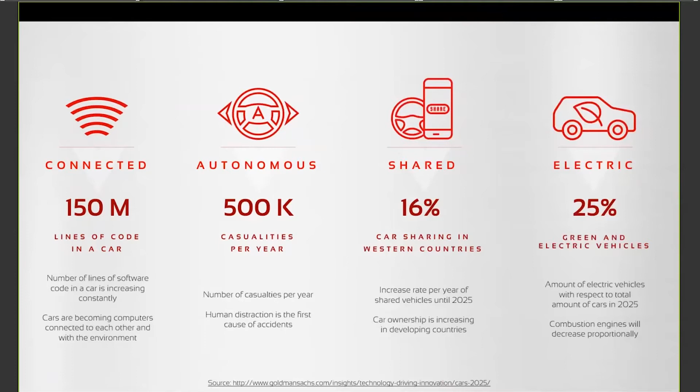All these trends are setting up important challenges to the process related to the creation and implementation of new vehicles. This is making an impact on automotive technology from different points of view. First of all, from the market, we're going to have less time and budget available, so the cycle to develop a new vehicle will become more and more shortened. At the same time, the product will show an increase in complexity due to the different systems that are going to be integrated into the vehicle.

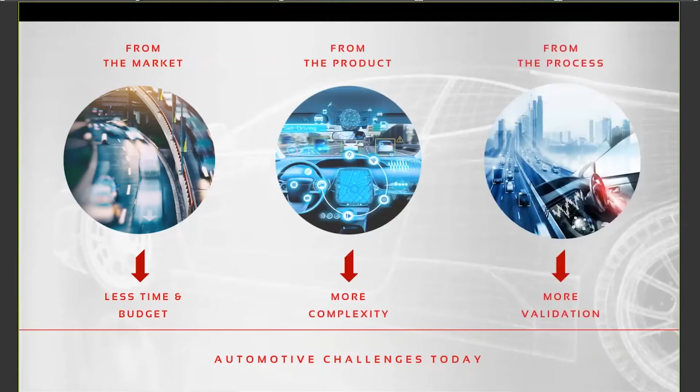Also from the process of developing a new vehicle, there will be additional challenges related to the fact that more validation will be needed. So for this reason, the traditional development process appears to be not completely tailored for the new challenges.

In the old style vehicle development, we were supposed to go from a concept to a sign-off phase of the vehicle, going through different phases which are from time to time seeing the appearance and the usage of hardware testing, which on the other side is showing up at a late phase of the development process. This could be an issue because of the new challenges set by the modern subsystems.

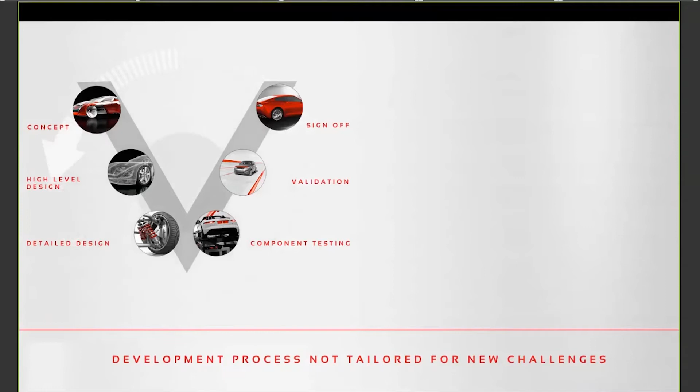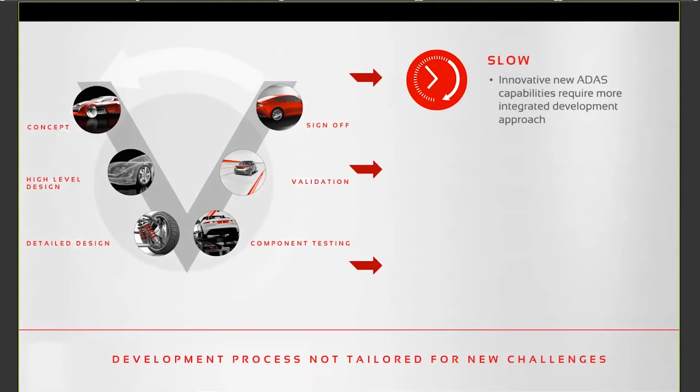So for what regards ADAS, the process of integrating the ADAS system requires an integrated development approach. The fact that the process of creating a concept, and only in a later phase having the availability of prototypes, is making this process too slow.

It could also be difficult to apply this process because the ADAS systems require a lot of miles to be driven to certify the prototypes, and this is posing an additional problem.

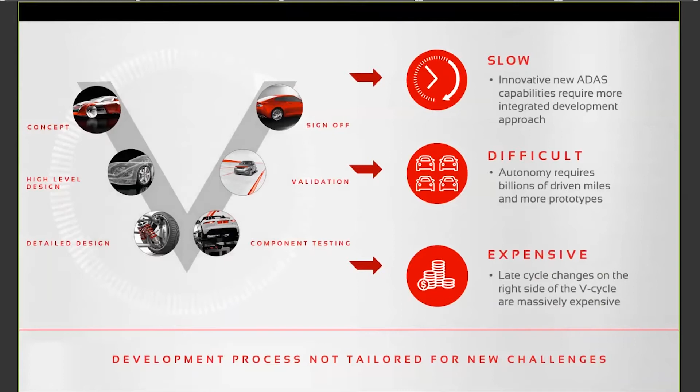And of course, all these aspects listed before are also showing an effect on the costs, so the cycle, as it was tailored before, is very expensive.

So as VI Grade, we are trying to set up a set of solutions that could help to make this process smarter, basically bridging the gap between testing and simulation. This is realized mainly by introducing a virtual environment in which it is possible to analyze and test the vehicle in an early phase of the development process.

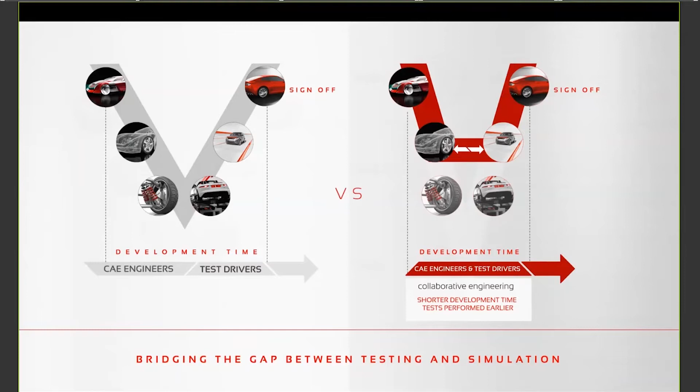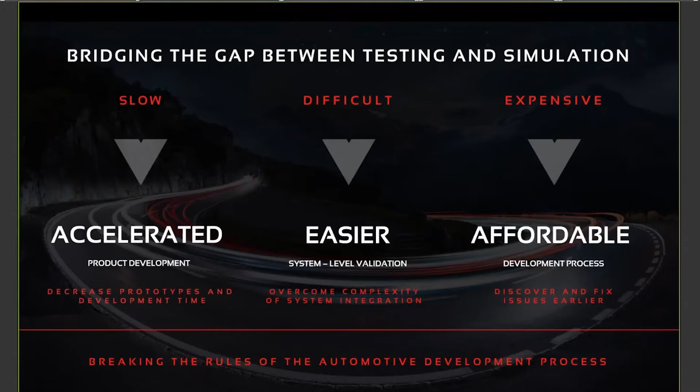So the usage of the driving simulator could be the bridge in which the development process can benefit from the advantages of being faster and at the same time accurate. As a result, we could transform the weaknesses that are characterizing the traditional development process into strength points, so it would be quicker, easier, and more affordable to implement and develop a new vehicle.

In order to do that, we rely on an open environment that, as I said, consists of different components, the main one being the driving simulator, which could integrate different types of technologies.

So we can mention the multi-body approach as a typical CAE approach to vehicle development from the point of view of engineering, but we can also include in the same environment other tools that are more focused on development of systems and controllers, up to the point in which we can interact at the early stage of the development process with prototypes and hardware components within the environment.

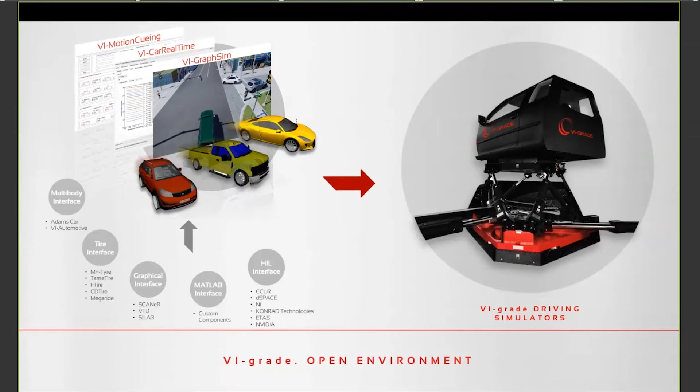Finally, with the driving simulator, we can have also the human being part of the process and be able to test the vehicle performance and vehicle characteristics right from the beginning of the development process.

If we focus on the specific application related to implementing a driver assistance system, we can face it from different points of view. We can start from offline and compare to what is required to test the same system in the real world. If we talk about the pure virtual simulation, the offline approach, there are some components in the environment that would be required.

First of all, we need a vehicle model representing the properties and dynamic response of the vehicle. We can eventually populate this model, including controllers that are now part of the vehicle environment. Besides that, we must think about a proper scenario in which this vehicle model should be exercised, so we need a simulation environment in terms of traffic and in general the environment in which the model can be simulated.

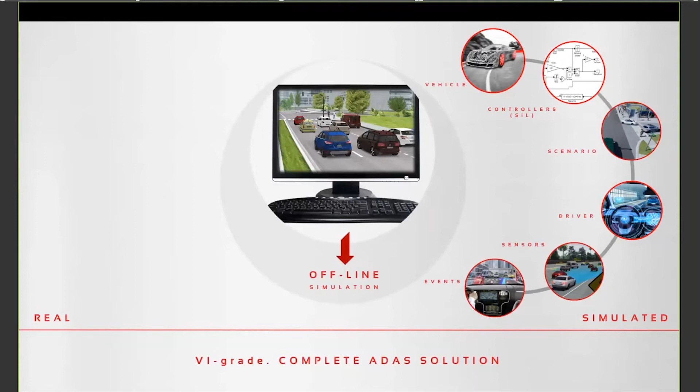We need a driver model, and also we need to set up a set of events in which a virtual sensor model can be tested. If we look at the same type of study in the real world, the approach is very similar, but the difference is that in this case we will have a full set of prototypes in the game. So the vehicle would be a real prototype, the controllers would be hardware in general, the scenario needs to be set up in a proper environment to be safely tested, and of course we will have the presence of a real driver with sensors and events that we want to create and simulate to assess the different functionalities that we want to study.

So we can understand that, especially in terms of events, setting up the specific condition in which you wanted to test a given ADAS function may pose some remarkable challenges.

If we combine the two things together, we may have an environment in which all these things can be used at the same time, taking advantage of their availability at different stages of the development process. So if we consider the driving simulator as an integration platform, in this environment you can have the virtual vehicle model, virtual controllers, but could also integrate hardware controllers with the scenario you want to test. At the same time, you can implement real hardware sensors that are excited by input coming from the visuals, for example, or from the radar, that are part of the virtual environment.

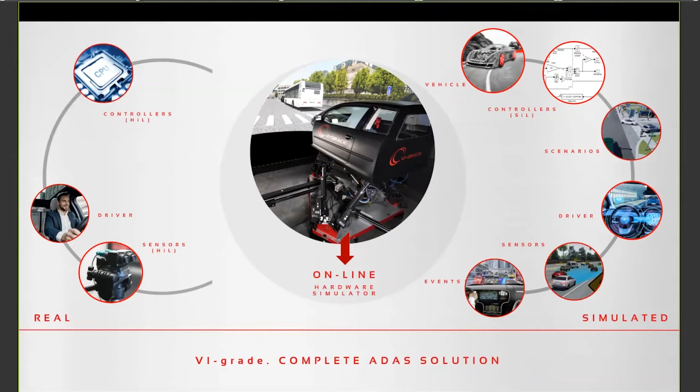And in all this scenario, the human is also playing a role. You can get the feedback that the driver could provide using a real prototype directly on a driving simulator. Here we can see a couple of movies showing this application on our driving simulator.

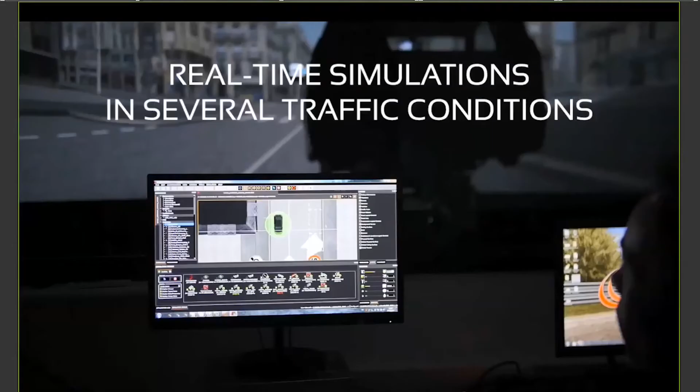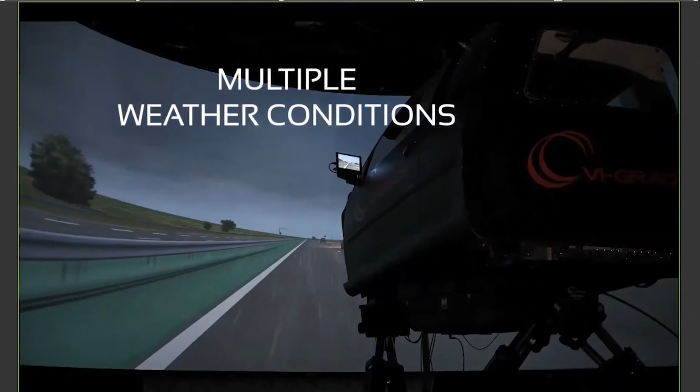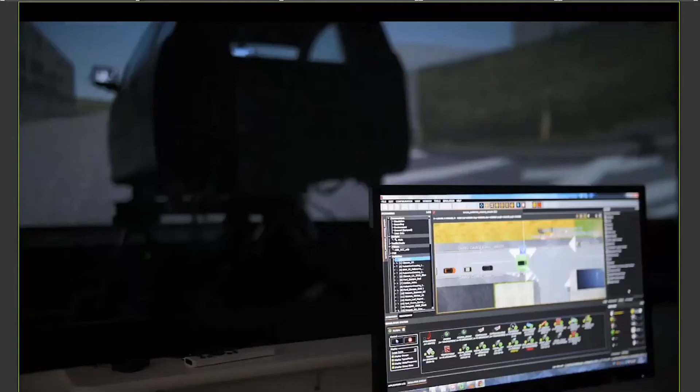For example, here you see our motion driving simulator, a dynamic simulator in the SCANeR environment, in which we can provide specific traffic conditions and also specific scenarios, like country or highway, or consider the effect of weather during the simulation. In this context, it's also possible to interact with specific additional entities like other vehicles, pedestrians, animals, and whatever you encounter during a real testing session, including the possibility of having a virtual representation of an ADAS system and sensors.

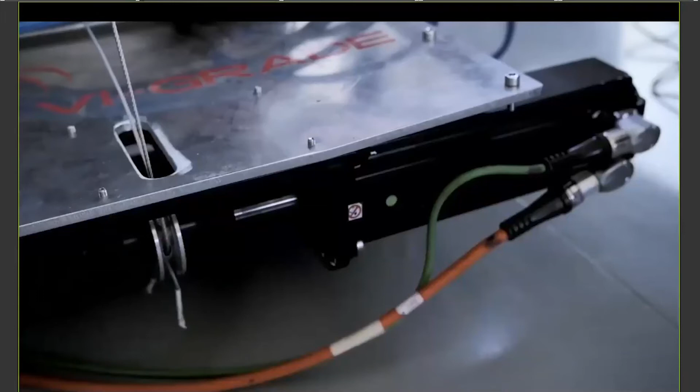Specifically with regard to the sensors definition, we could also take a further step to test the real or virtual sensor in this environment. In this video you see an application related again to a driving simulator, in which besides the typical components like active seats and belts provided with our simulators, and of course the vehicle model, it is possible to test specific functions that are part of ADAS systems.

For example, we could implement an autonomous driver that could be directly tested. Here you see that the driver is activated, and basically the automatic control algorithm is taking control of the vehicle, and it is also possible to manage the transition between the machine and the human.

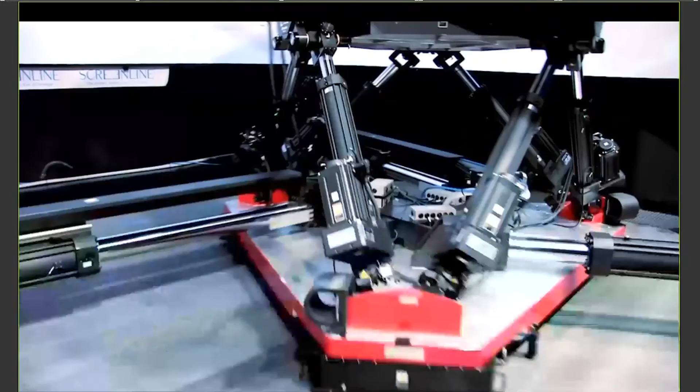It is possible to focus and reproduce highly dynamic maneuvers, comparing the automatic behavior of the autonomous driver with the purely human behavior, or also combining the two in an assisted configuration. So this is basically an overview of the possible applications available when using a driving simulator together with proper modeling of ADAS systems and sensors.

So now I would like to hand over to my colleague Mark, in order to have a deeper insight about some of the applications that we have been implementing.

Yeah, thank you Francesco. Just to go into a little more detail of the things already described in the presentation so far, here we can see the general architecture for using VI Drive Sim for ADAS applications.

The way this works essentially is that Drive Sim is acting as the hub. Everything is coming through Drive Sim, which is the real-time system, entirely necessary if you're doing driver-in-the-loop test cases. You can connect the hardware side of things, so in this case you could have a radar or a camera, connected to the Drive Sim ecosystem, communicating in both directions. We can send information to a camera and then receive the information back.

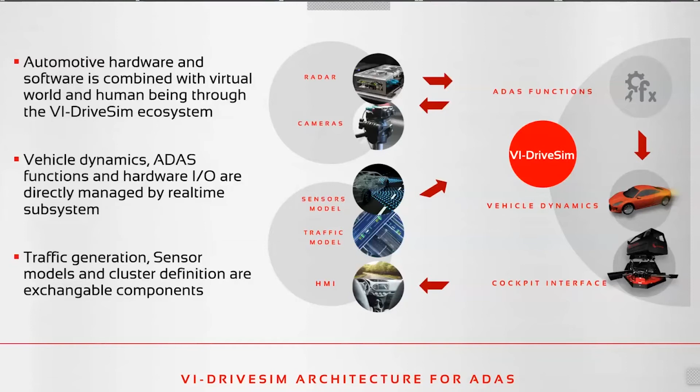To give you an example of some test cases we've built up at our sim center using the DIM, we wanted to introduce a lane detection system. We set up the environment as shown here: a physical camera pointed at a screen, looking at the image generated from the virtual environment. The camera is then connected to an ECU, in this case the NVIDIA Drive PX2.

It's receiving the image from the camera, and the onboard AI is processing this image, searching for the lane markings. The lane marking information is then output from the ECU, fed back into the Drive Sim ecosystem, at which point it can be picked up by the ADAS controllers and used to control the vehicle in some way.

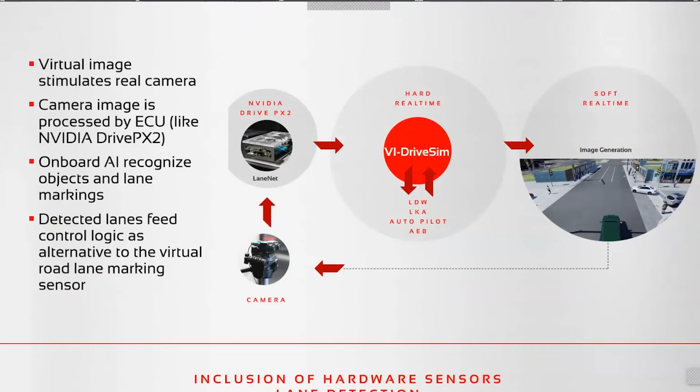Going a little further into this test case, there are some additional possibilities. As I said, we had the camera pointing at a screen, the projected image on a screen or monitor. Alternatively, you can inject the image directly into the NVIDIA board, bypassing the need to actually point the camera at a screen.

A nice option in this case is, because we had the ground truth for the lane markings, we could compare the output of the LaneNet, the AI calculating the lane markings, with our ground truth reference, and then tune the system and validate that it's working as expected.

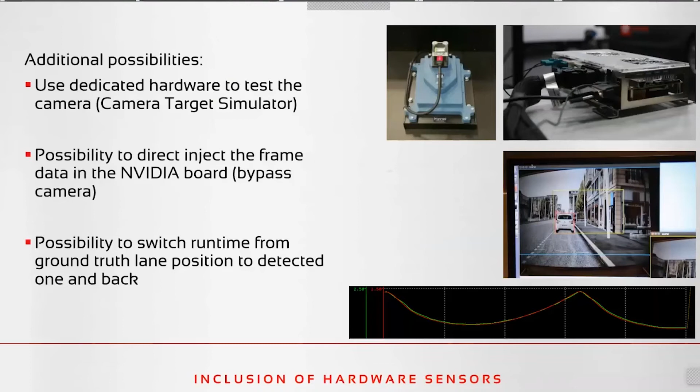Another test case we set up was using a radar instead. In this case, we had this radar target simulator, which we connected to the Drive Sim ecosystem as shown in the previous slides, and more or less the same concept applies.

In this case, we would use the virtual sensor inside the traffic software to detect the virtual object. We then send this virtual object's position and information to the radar target simulator, which will stimulate a physical radar, the same radar you would end up using on the actual car in reality.

So you stimulate this radar, and the true output, the real output you would expect to find on the real car, is then fed back again to the Drive Sim ecosystem and can be picked up by any ADAS controllers present, either software in the loop or additional hardware. These ADAS controllers can then influence the dynamics of the vehicle.

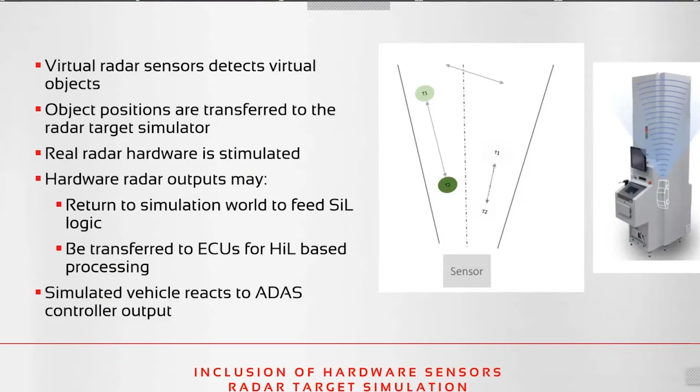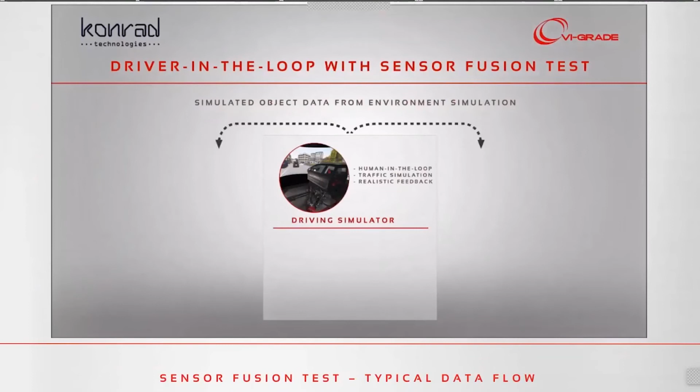On top of this, it's clear that for full ADAS applications, you need to be able to run multiple sensors in parallel. So the VI-DriveSim solution is capable of supporting this. We set up a test case with Konrad Technologies, running the camera and radar simulator in parallel, all in real time. The concept is the same as before: we generate virtual data of simulated objects, send it to the real simulators, the radar and camera in this case, which stimulate real components. The output of these real components goes back to the real-time system, which can then be used by ADAS controllers to control the vehicle.

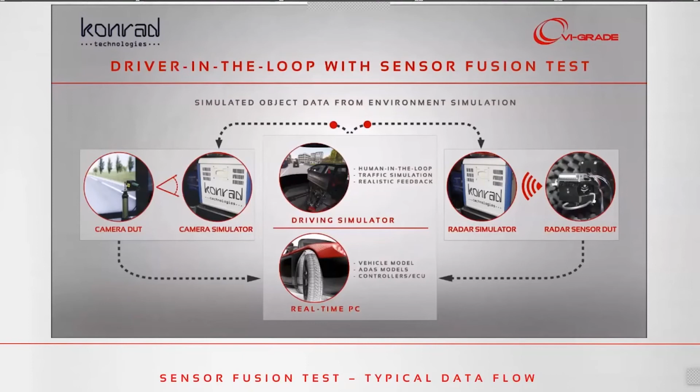There's more than 50 actors of various types, not just cars. There are pedestrians, motorbikes, cyclists, and so on. Additionally, it's possible to adjust the weather, and this is possible during runtime, so you can have dynamic weather conditions, changing from a nice sunny day to stormy conditions as you please.

On top of this experience, we built some controllers, so you can experience the effect these controllers might have and how this might influence the human perception side of things.

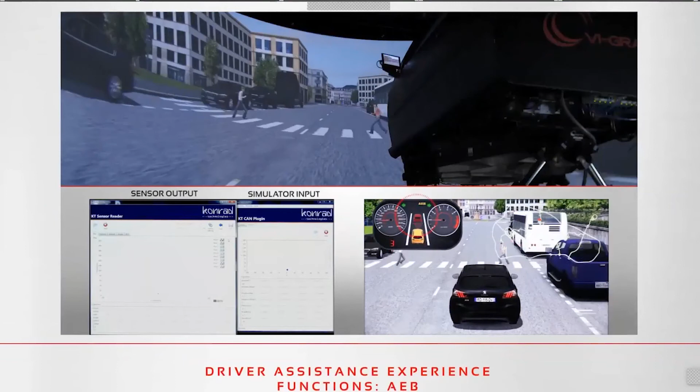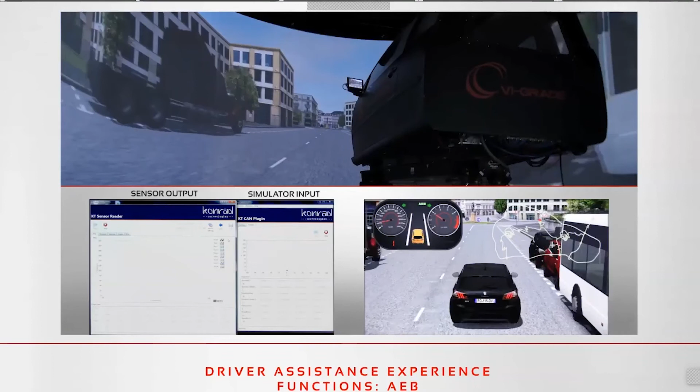In this case, we have the emergency brake, and we've set up a predetermined situation. You would drive around in the urban environment, with various cars driving around randomly, but at the same time we've set up triggered events. If you want a repeatable case, we have an area where pedestrians are waiting for you to drive by, and they'll run out in front of you. This is nice because you can repeat the situation over and over and understand if there are some flaws in the AEB system.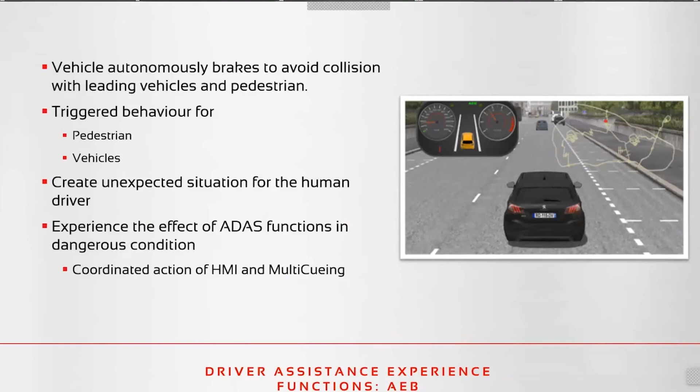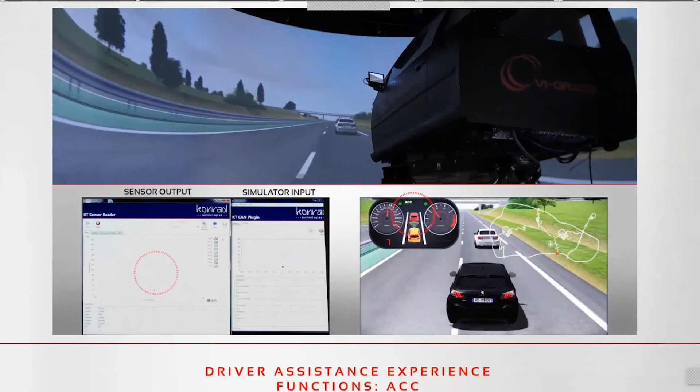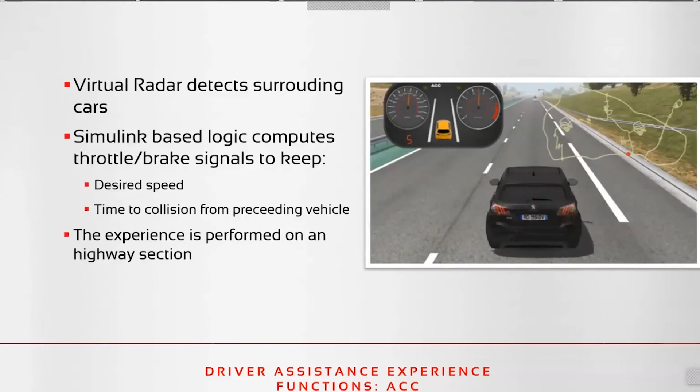Another system we've implemented is the ACC, the Adaptive Cruise Control. Again, in all these graphics, you can see in the bottom left the Konrad radar target simulator. This receives the virtual object data and simulates it to be received by the physical radar, which is fed back to the real-time system. On the right side at the bottom, we can see all the different feedback coming to the driver. On the dashboard, you have the visual cluster, and the ACC is adapting the longitudinal speed of the car, so you don't follow too closely to the vehicle in front of you.

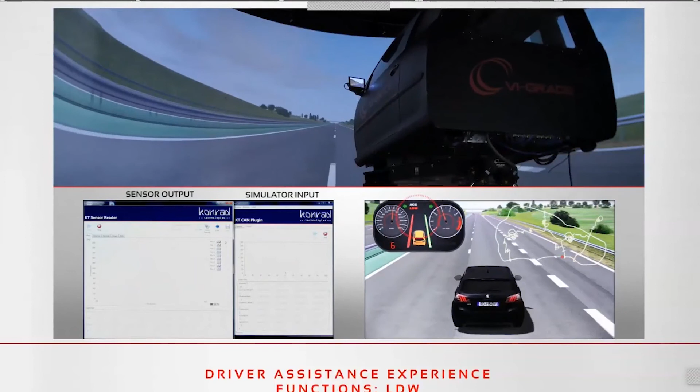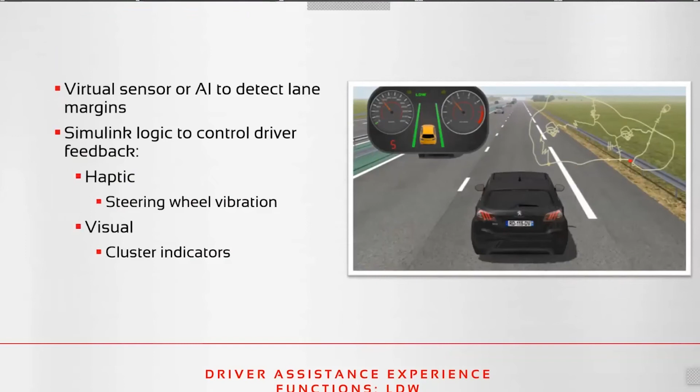Then we have the lane departure warning. Again, the same environment on the highway, and in this case it's providing the driver with a warning when they're too close to the edge of the lane markings. This is provided visually on the dashboard, as you can see in the bottom right display. There's also the possibility to add vibration to the steering wheel, as a clear indication to the driver that they should pay attention and move back to the center of the lane.

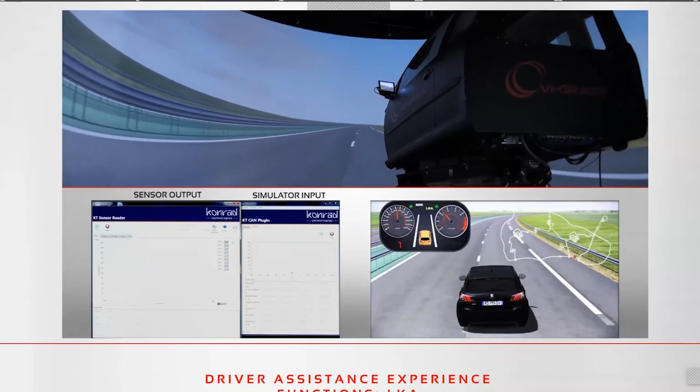The obvious next step after lane departure warning is the lane keeping assist system. We're still using the same bits and pieces, so no need to completely rebuild everything from scratch. This system uses the same idea as lane departure: the camera detects where the lane markings are, or alternatively uses the ground truth, and it provides a steering input to return the car back to the center of the lane once a certain threshold has been reached. On top of this, there's also acoustic feedback to the driver, an auditory alert saying it's going to take over and move you back into the center of the lane.

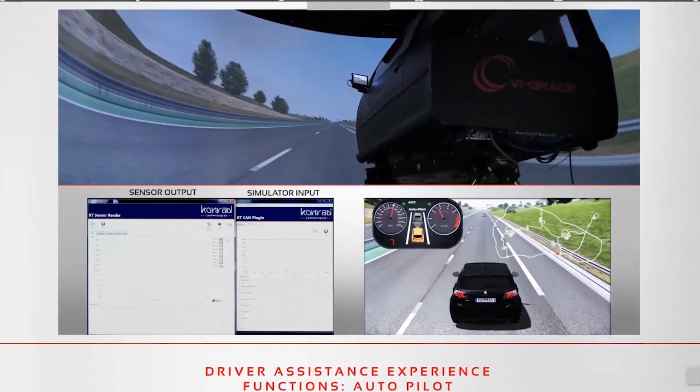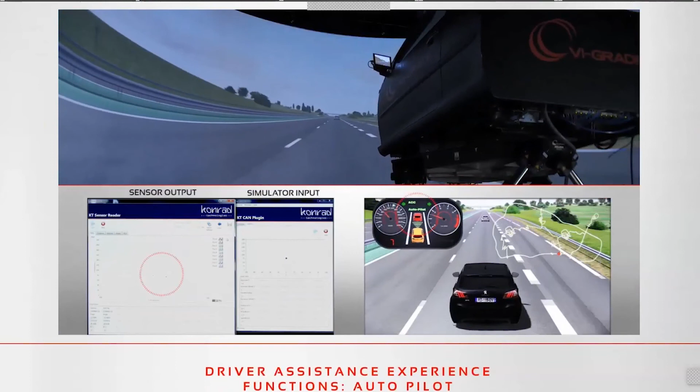The final system we've built for demo purposes is the autopilot, which is essentially a combination of adaptive cruise control and lane keeping, but instead of the lane keeping only being active when you move to the edge of the road, it's active all the time. So the driver stays in the center of the lane, and the system navigates the corners in the road as appropriate.

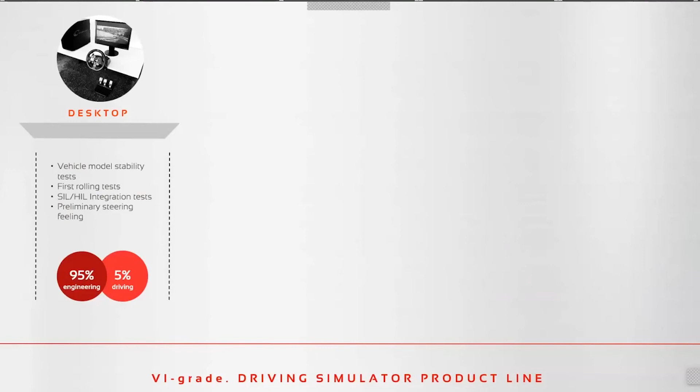So we talked about how everything is implemented, but now I want to talk about the options you have, what products are available to the customer. We'll start with the desktop simulator. This is very much the entry-level solution, intended for initial testing, preliminary steering feel, and model stability validation.

But you are quite limited in human immersion in this case. The next step up is the compact, which adds much more for the human side of validation and evaluation of the ADAS system. You have a much larger screen, high quality image, and a high quality steering system for good and meaningful steering feedback. This system can also be kitted out with active seat and active belt technology, which provide contact forces to the human, so you can start to evaluate how the car is reacting to the ADAS controller's inputs—whether it's too strong or too weak.

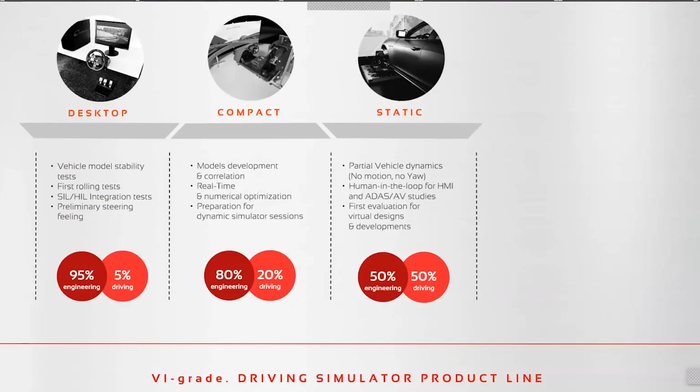However, there's still quite a lot of immersion that can be added to the system. In this case, we have the static simulator, which is essentially ready for true evaluation of human-in-the-loop driving with ADAS and HMI studies in mind, because the driver needs to be very much in the environment. Again, active seat and active belt technology is available, providing contact forces to the driver, and additionally there is the shaker system to provide vibrations through the chassis.

Finally, we have the full dynamic solution, which is essentially taking your static cockpit and putting it onto the motion platform, a 9 degree of freedom motion platform. This allows you to give some inertial feedback to the driver, adding an extra layer and level of feedback and immersion, so you can capture even more of the quality of the controllers you're testing from the driver's perception point of view.

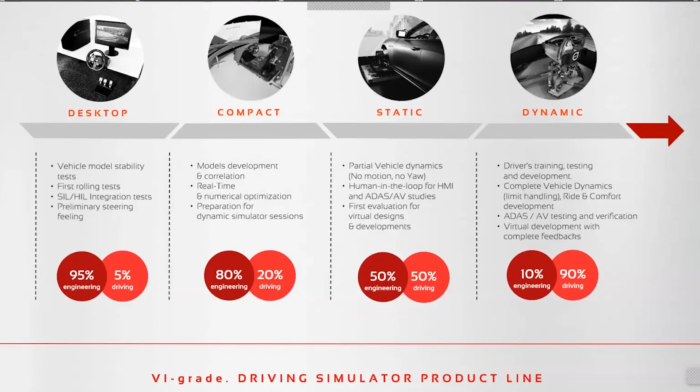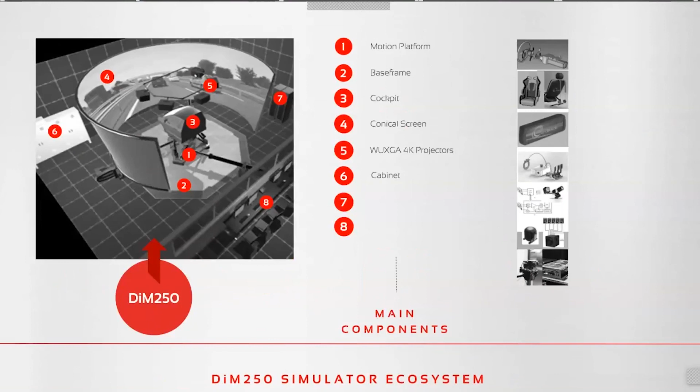Moving on to a bit more detail of the DIM. For the DIM 250, it would look something like this. You have the motion platform, as I described, the 9 degree of freedom platform, floating on top of the base frame on magnetic air pads to minimize friction between the two surfaces, so it moves around seamlessly. You have your cockpit on top, which can alternatively be used as static, and the big conical screen with high quality projectors to truly immerse the driver in the environment you are testing.

On top of this, there are various hardware accessories to choose from. You can define exactly the steering assembly configuration you want. You have the active seats and belts, rear and side mirrors—important especially for ADAS applications where you'll be looking behind you in highway scenarios to see other cars around you. There is also the active brake system, so you can tune the feel of the brake pedal—how hard or soft, the progressiveness—plus feedback coming back through the pedal, such as ABS.

We also have biotelemetry and eye tracking systems, to add objective results to the human driving data. It's nice having subjective feedback, but it's also nice to have objective numbers to look at sometimes. This allows you to objectively analyze the human's reactions to specific events. Finally, we have shakers and speakers to completely immerse the driver in the environment, and you can add all sorts of sensors and hardware in the loop, such as cameras and radars.

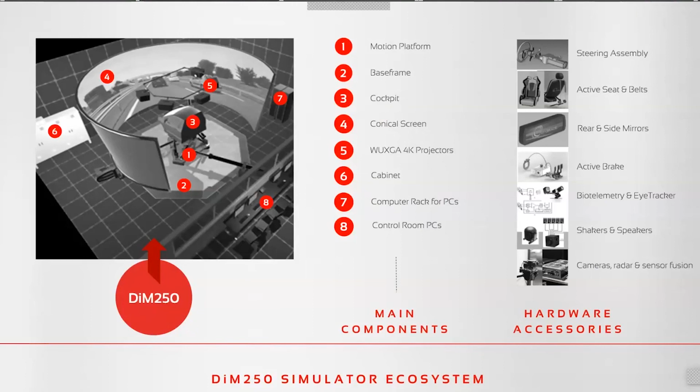So in summary, we've shown how VI Grade is approaching the ADAS environment and the task at hand and problems to solve. We've seen how traffic and sensor elements can be included into the modeling environment, connecting reality and simulation, and finally some clear examples of this technology used in practice.